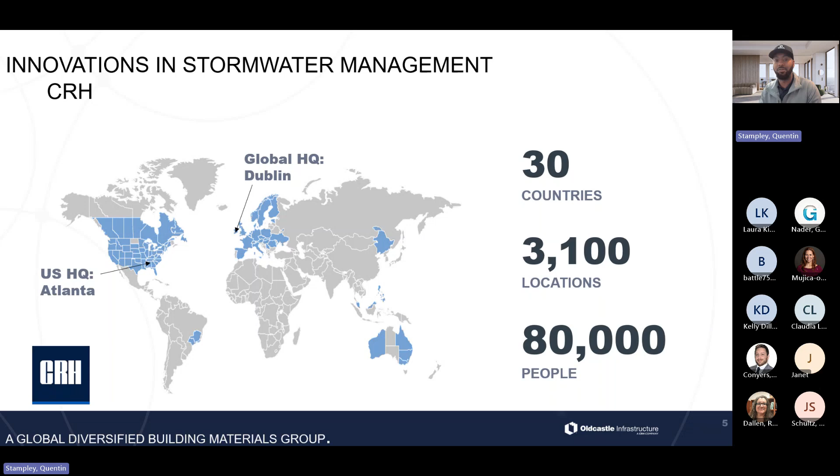Looking at this just shows a wide catalog. And with this wide catalog, we are the largest precaster manufacturer in the country. We're also able to service engineers across the United States. Every different state has different approvals, different regulations, and this allows us to have different products everywhere to service those markets.

It'd be nice in certain markets to add more, and we do have a regulatory team that will get in and work with the officials in the state to get things moving. That's one of the things I would like to have next, our regulatory guy get in with you all and see what we can start possibly moving in this market.

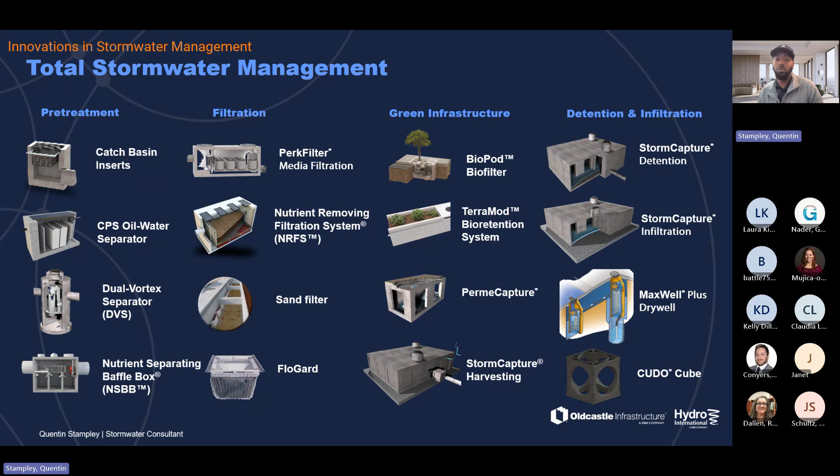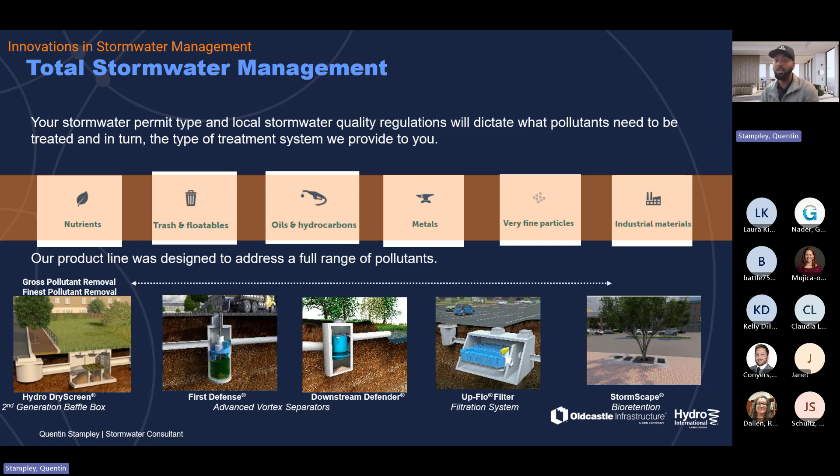Along with that, with the acquisition, we did acquire additional products where you get baffling, separation, filtration, and bioretention. Adding these five additional products is definitely helpful in the market. We also have some that are actually being tested in the lab, new products coming very shortly.

So today my focus is going to be on storage solutions, which will be our storm capture and our CUDO, and then we'll talk about pretreatment solutions, which will be our NSBB, downstream defender, and our first defense.

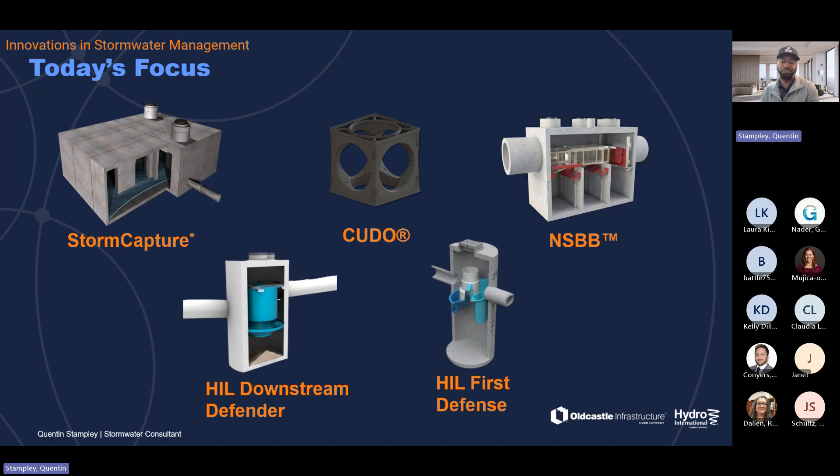So jumping in with our storage solution, storm capture. I can ask a question if anybody feels free to take themselves off mute to answer: has anyone seen any underground detention or possibly see where this can be utilized in the Oklahoma market?

I haven't seen any personally. I think there are some around here. I think there's a big one that was just installed not too long ago, but I don't remember the location. But yeah, we've got tons of parking lots and streets and parks, countless opportunities. It would just have to be retrofit more than likely.

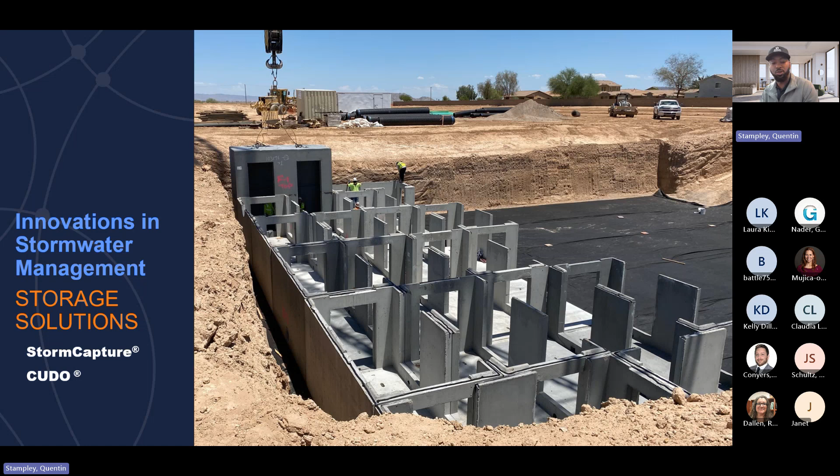Understood, thank you. I was trying to see if I can get it to show who's talking, but it's not working for me. I'll jump in and give a little background on storm capture. Again, if you have any questions, feel free to put it in the chat.

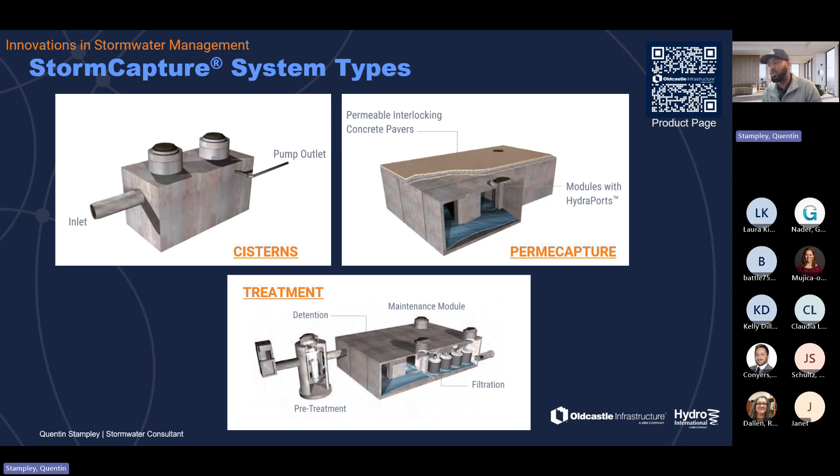And at the bottom, we have the ideal scenario: pretreatment upstream, your detention, and then also filtration modules around the outlet pipes.

Now, I did want to jump back into detention versus retention, because originally when I joined Oldcastle I was on the engineering side, and a lot of times when I got pulled into calls there was a big mix-up on what they were designing for. Was it detention? Was it retention? It was called out on the plans a lot incorrectly.

So I have this little saying that is, I think, very memorable. When you think of detention, just think about a child having to go to after-school detention. They're being held there for a short amount of time and then they get to go home to their families. So with your detention, that's what we're doing, we're holding that water there for a short amount of time. Your outlet pipe is at the bottom, so it's constantly draining out. There's no holding time for that water, but it's being slowed down to replicate the natural state before any impervious area is put in.

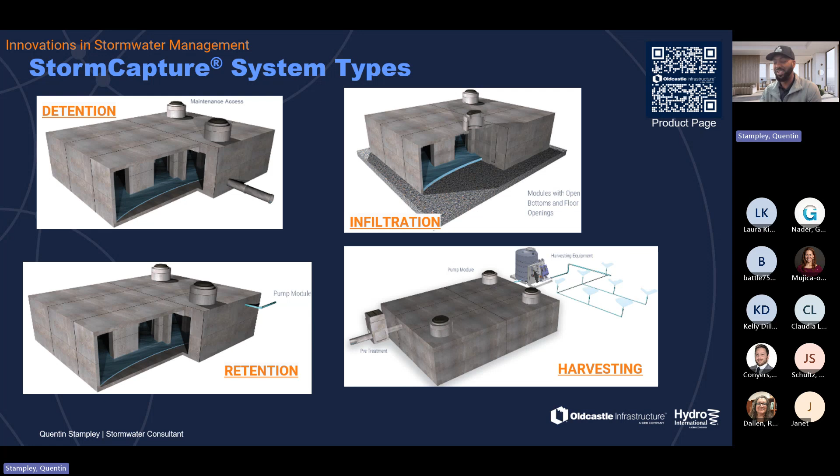When we look below, we see retention, and you also see the outlet pipe at the top. I always say, and I pause a little when I say it, you can think of someone going to jail and being held there for a much longer time. That's what we want to do with our water, we're trying to hold it for a much longer time. So that water has to fill up to a certain elevation in the system before it's actually able to be released. Those are the main differences between detention and retention, and once I explain it that way, people rarely have an issue differentiating the two.

With our storm capture, it's a structural precast concrete structure. The inside dimensions of our system are 7 by 15, and the outside dimensions are 8 by 16 -- it's a very big box. Our inside heights vary from 2 to 12 feet here in the Texas market. Other places, depending on where you're at, a deeper system would go up to 14 feet, which is the max we can go. We use standard accesses for maintenance, which is 30 inches in diameter, though we can go smaller or larger. We also have interior walls and interior windows.

Below my writing you'll see the SC1, that's our first configuration, an open top with a base, ranging from 2 to 7 feet. I always call this the bathtub design -- you see it sitting upright like a bathtub, and we just place a lid on top of it. Whenever we're doing infiltration, to let water drain through the aggregate layer into the soil, we'll just flip that bathtub over to allow the water to drain out.

On the right side, we have our SC2 module or configuration, which we call the clam shell because it comes together like an actual clam. The heights vary from 6 to 14 feet, but again here in the Texas market we only go up to 12 feet. I believe if we were to service Oklahoma, it would be shipped out of our Dallas location.

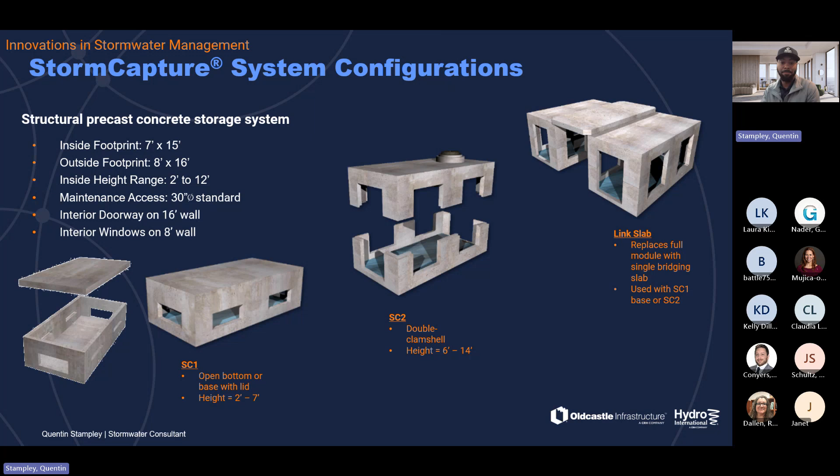With that, when we do our designs, we like to include something called link slabs. Our link slabs are slabs supported by the adjacent module. It replaces one full interior module, and we can use this for both configurations, SC1 and SC2. The slabs are typically 6 inches thick, but occasionally 8 inches thick depending on the actual design configuration.

We can do a checkerboard style, which you'll see on the left with the actual hatches -- those are the checkerboard style design. Then we can also do a straight run design. When we do a straight run, it typically depends on whether we're limited in footprint and need to increase the storage volume, so that helps us pick up additional storage volume.

We can use our link slabs on detention, retention, and infiltration options. Whenever you utilize a link slab, it will come with something called a grade slab. If you look at the snippet in the middle bottom, you'll see that slab bridged on top. In that dark blue area at the bottom, you'll have a grade slab that holds the system's invert to make sure water moves freely and correctly within the system.

The purpose of incorporating link slabs is to pick up storage volume and lower costs. You're removing all of your perimeter walls within that module, so you're saving on concrete and rebar costs. You're also gaining more storage volume by removing those walls, which also helps cut down the footprint.

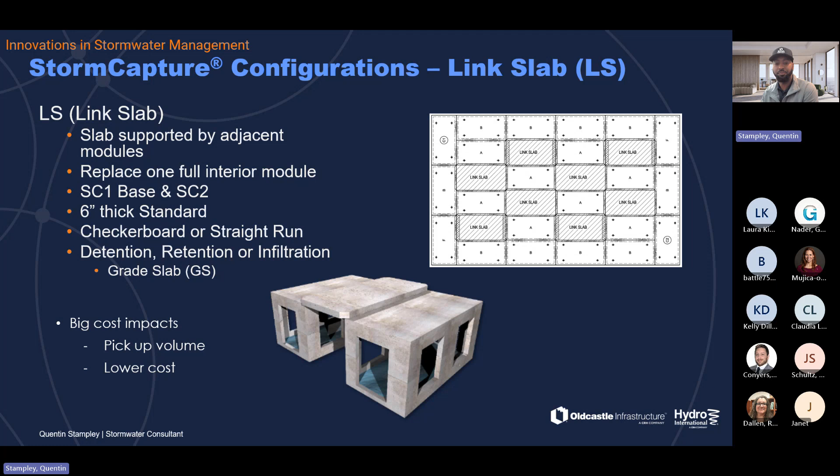Our module designation includes one interior module, which we call our A module. It's open on all four sides and is surrounded by other modules on all four sides as well because it's open. We also have our perimeter module -- if you look to the right, all the other ones you see outside of the A are what we call perimeter modules, which have one or more sides exposed to soils, and this is also open for pipe penetrations and connections. At the bottom on the A module, we have our short wall where we have our door.

The doors actually go all the way down to the system invert to allow the water to completely drain out of the system. On the long side, you have windows, like standard windows that have that portion right under the lip of the window. Once water levels are lower than the bottom of that window, there's a Termaduct below it, 4 inches in diameter, that allows water to continuously drain, just slower, throughout the system and out those side walls.

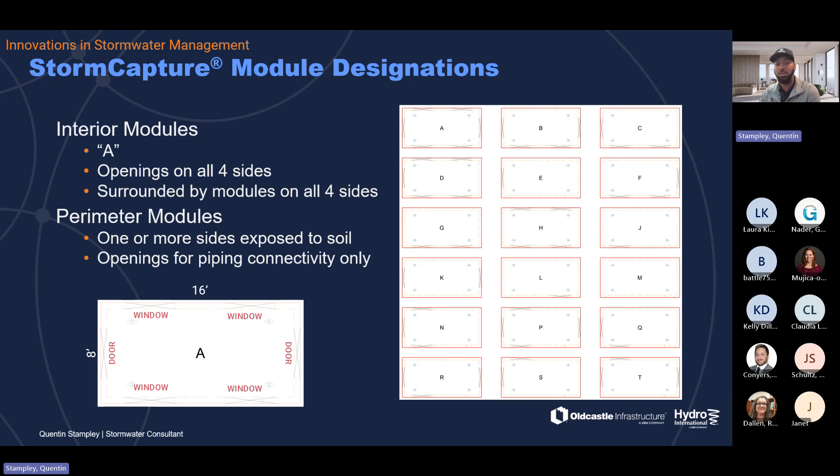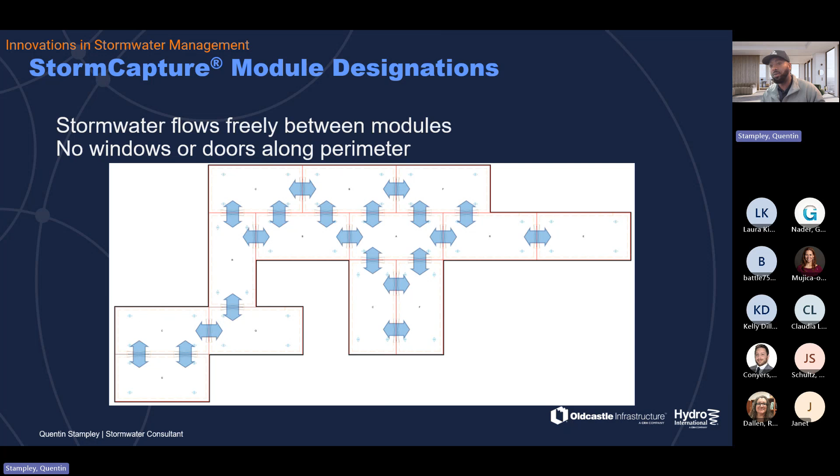This diagram shows all the different ways stormwater can flow through our system. Our system sits on a 0% slope, so it's drained by gravity unless you put a pump inside. Wherever your outlet pipe is will determine which way the water drains out, but there's no limitation on where it can drain. It will drain out of the system with less than 1% of stormwater left inside.

The materials we use on our storm capture are, first, butyl rope, a rubber sealant that goes on the horizontal joints. Some people call it RAM-NEK, some call it butyl rope, depending on what you've heard it called.

Next we have non-woven geotextile fabric, a roll dimensioned 15 by 300, which prevents fine soils from entering the system. Lastly, we have joint wrap, a self-adhesive wrap that goes on the vertical and top joints, which also prevents fine soils from entering the system.

Everything shown here is what we'd consider a soil-tight application. Typically when our engineers send us plans, if we're in a preliminary state, we'll walk through the design. All these things automatically go with this type of design regardless of the desired outcome. You'll still get the soil-tight applications, but as we move through the project, we'll determine if we need to incorporate other materials that may change it to a watertight application instead.

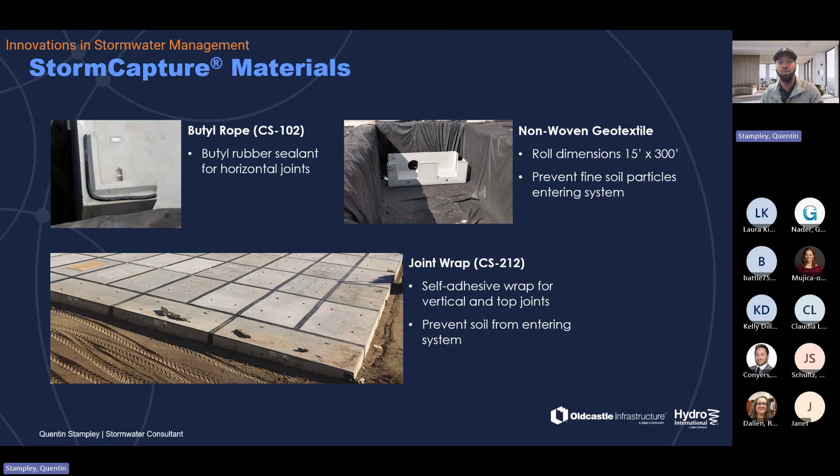With that, I typically ask my group when I'm presenting what they see differently or why they think we'd need a watertight application. Since this is virtual, I want to get some interaction since I can't see anyone. Does anyone know why we would want to use a watertight liner on something like this for detention? I won't bite. Anybody? Apparently not. Are you sure? So would it be just to control what water goes in and what water goes out, and where it goes in and out?

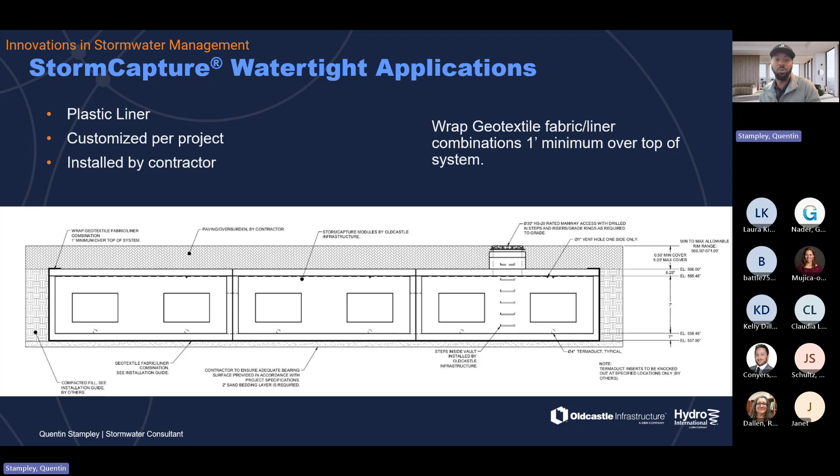Thank you for the response. I appreciate it. I love the interaction, it makes me not stutter over my words because I feel like I'm talking to people.

I have a slide where you can see where the application, or how the application, is being applied. Again, these are older photos where they were tying down the liner, but now you can just throw some sandbags on top of it and you're good to go.

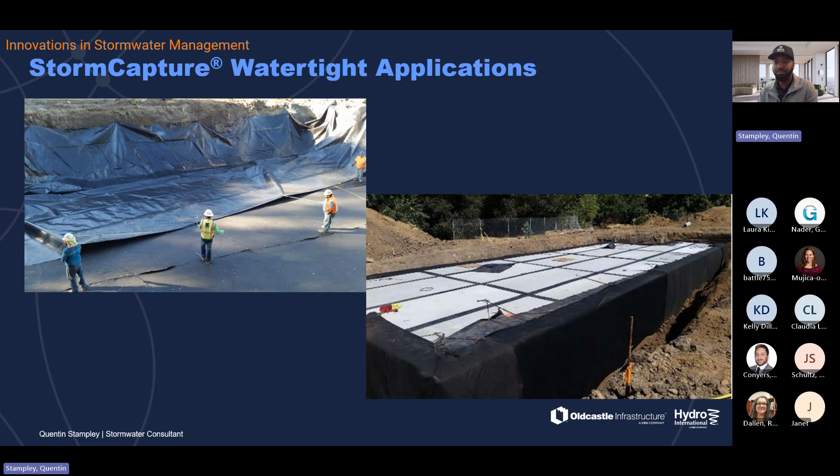Our system is HS20 rated, which is a design standard vehicle loading for bridges and highways. It represents the heaviest vehicle expected to drive on a road or bridge. This includes ambulances, most fire trucks, cement mixers, and semi-trailers. The HS20 is not a mining truck, farming equipment, compactor, crane, track vehicle, etc.

You can actually use construction equipment over our system in the field. We just need 6 inches of cover over it before they do that. And we always say if you can drive over a bridge on the US highway, you can drive over our storm capture. So you're getting a robust system.

I always tell clients this is like the Ferrari of detentions. You're really getting an engineered product designed to stand, I'll say 100 years plus, because we're dealing with precast concrete. If you want that longevity, this is what comes along with it, and the pricing will come along with that as well.

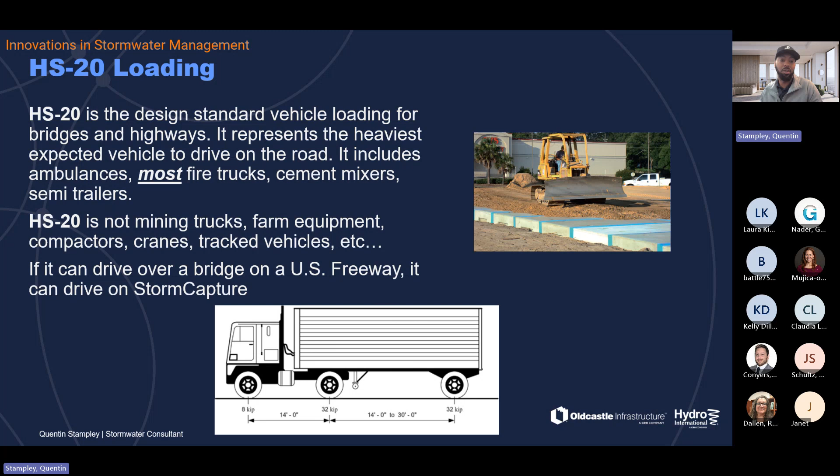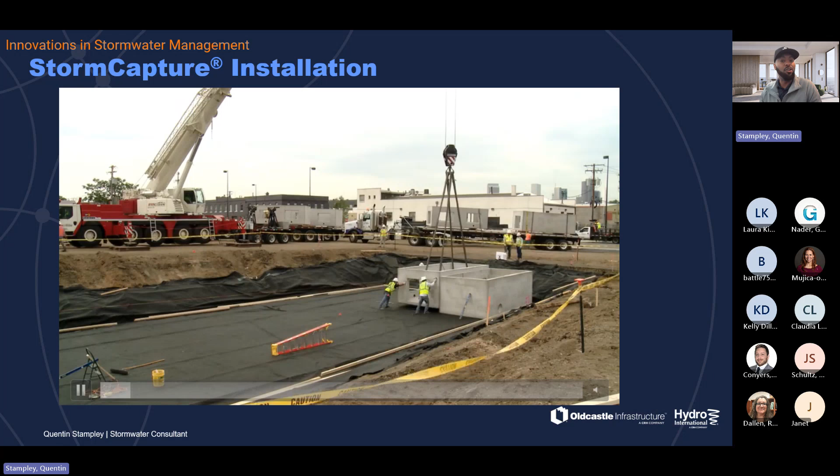I do have a video here just to show you how the install looks. I always say it's like everybody played with Legos once upon a time in their life - these are just huge Lego cubes. And the plans you get are the design if you're actually working to build a certain configuration.

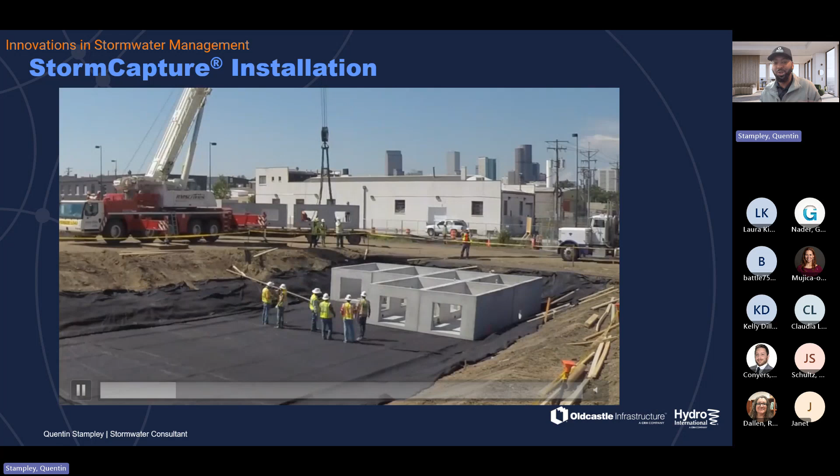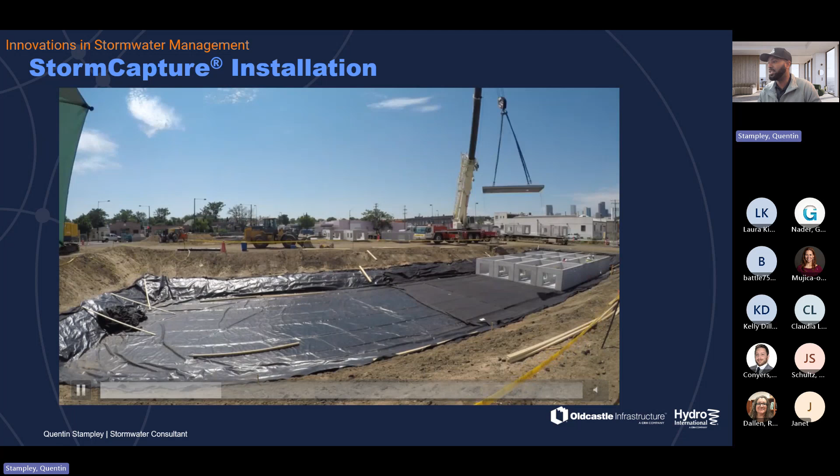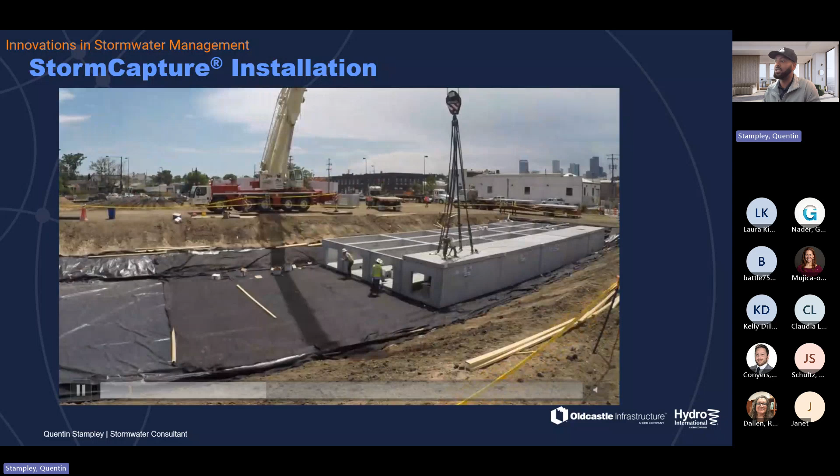In a pre-construction meeting, they'll talk about crane setup, where they plan to start. From there, we'll dispatch our modules to the site for an easy install. A lot of times they'll sit the actual lids to the side so they can get the modules in, and when they have a break between trucks, they'll start adding some of those lids so they're not held up. This install was done in 1 day, and this is a 6.5 foot SC1.

This is the first configuration we have, the bathtub design with the base and the lid. You can also see the materials being installed there with the butyl rope and the joint wrap, etc. And then you also see the non-woven geotextile fabric at the bottom.

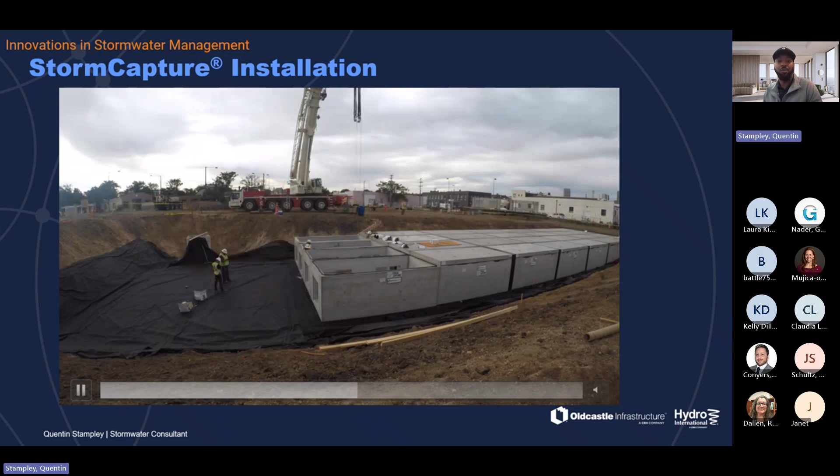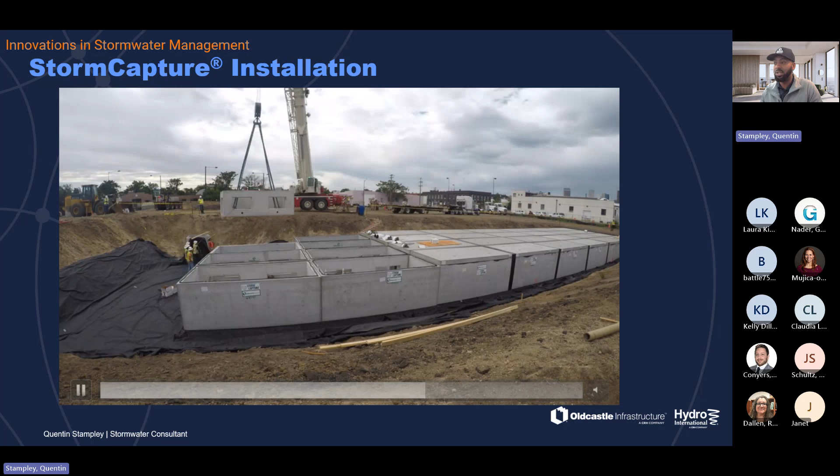One of the cool things about our system is we don't need a slope running for dear life. Whenever they dig the hole for the detention itself, all we need is 1 to 2 feet around the perimeter of where our systems should be for excavation purposes. That'll save the contractor money because they don't have to keep digging extra space just for these modules.

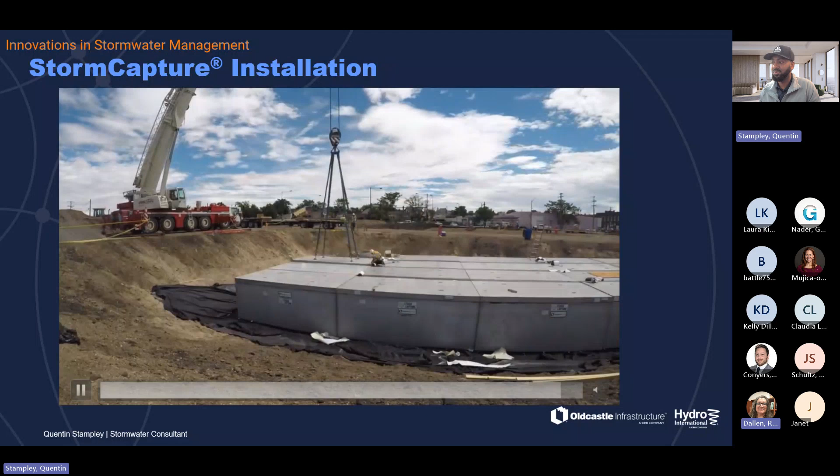No, I love this video. It's great, it really shows the whole process there.

That's fantastic, thank you. I have an install here in Texas that's actually starting on the 17th. We're doing a case study on it, so our marketing team is going to have a videographer come out, and they're going to do a nice little write-up and send it out to everyone in the Texas market, and I'll be posting it on LinkedIn. I'll be excited to share. If anybody follows me on LinkedIn, you'll be able to see that project and that design, but it incorporates our storm capture and one of the other products I'll be speaking on, the NSBB.

That's great, thank you. And that's something we can do in the Oklahoma market as well. Whenever that time comes where we start making leeway with stormwater in that market, we can have marketing come out and do case studies, and that'll help get the word out on whatever products are being pushed.

So I'm just going to jump in, and this one is going to be shorter because this is a product that's off the ground in our California market, but we're trying to expand it across the United States. One of the positive things for you all, we have an enclosures plant in Oklahoma, and our enclosures plant is plastic. So we're trying to get the resin for these actual modules correct with testing and plan to start producing these out of Oklahoma. So once that happens, if y'all end up moving to detention, this may be the first option over a storm capture that will be shipped from Dallas versus a local shipment.

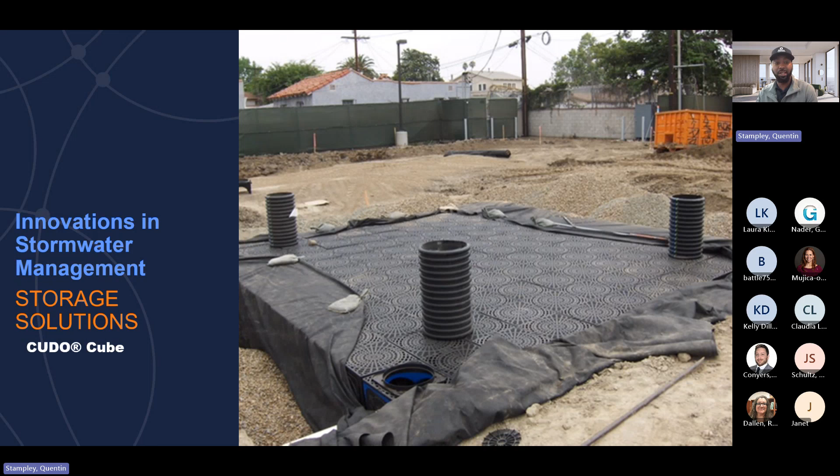So with that being said, this is called CUDO. Our CUDO is a modular plastic cube that's used to create compact underground storage systems, has a unique open design with structural integrity that increases the water storage, and it makes it easier for inspection and maintenance. And once you can see how the CUDO looks, you can kind of see what I mean with it making it easier for inspection and maintenance.

It is made in USA, currently California, hopefully soon Oklahoma, molded polypropylene plastic, and it is HS20 rated. CUDO is lightweight. Each one of these cubes are roughly around 21 pounds.

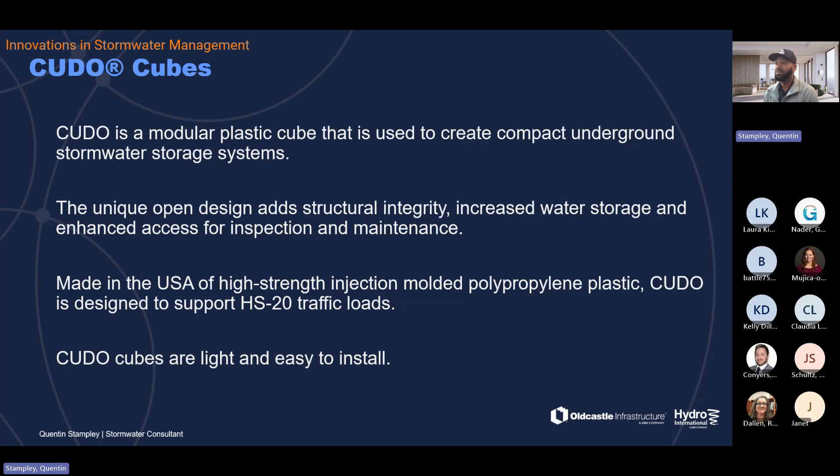As you can see with the CUDO on the right, it has a spherical design, so it is very open. So when it comes to maintenance, they can easily come in with a backhoe, put that backhoe down there and clean the system out. That also will prevent a lot of clogging in the system itself. No one will actually be able to get down in there, but they'll be able to actually clean out the system. So that is one of the positives.

With that, 95% of this cube will be utilized for storage volume. The other 5% is the cube itself. It is 24 by 24 by 24 inches. And again, it's very lightweight, so it's easy to handle and easy to install.

It does have minimum number of components. I don't know if you can see from the picture, it has like a line right in the middle. It is two pieces, snap together, snap apart. So it makes it very easy for them to get in the field, have that install, and get out of there. This can use native soil, so that saves the contractor money for buying additional soil.

Here we use C33 sand. I'm not sure what the Oklahoma market would use, but that would save the contractor money on bringing in additional soils. 18 inches is the max pipe size, but we can have a connector, a structural connector, if we do have to have multiple pipes that are much larger.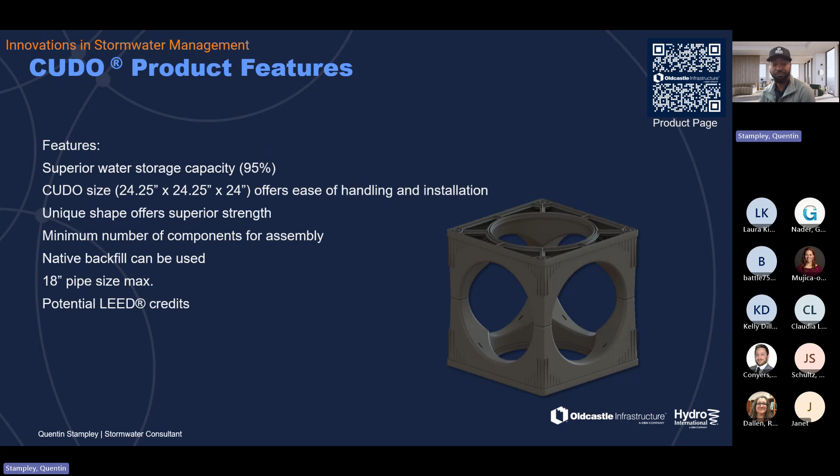So with this, the max cover over this system is 5 feet. Minimum cover is 2 feet. If it is going somewhere that's going to have live loads, we'll have to include a geogrid. That geogrid is not mandatory if it's not going somewhere that is going to have live loads. With that, a geogrid basically just evenly distributes the live load across the system, so we won't have any failures.

At the bottom, you can see we have a CUDO 1, 2, 3, and we also have a 4 as well. But depending on if we're going to have storm capture in the same market as CUDO, then we would not push the 4 because the storm capture will be cheaper at that point.

On the right, you can see the different components. You have your bottom panel, the CUDO cube itself, side panels, and if we're stacking these for a deeper detention, we'll have a coupling and a pipe panel for those pipe connections.

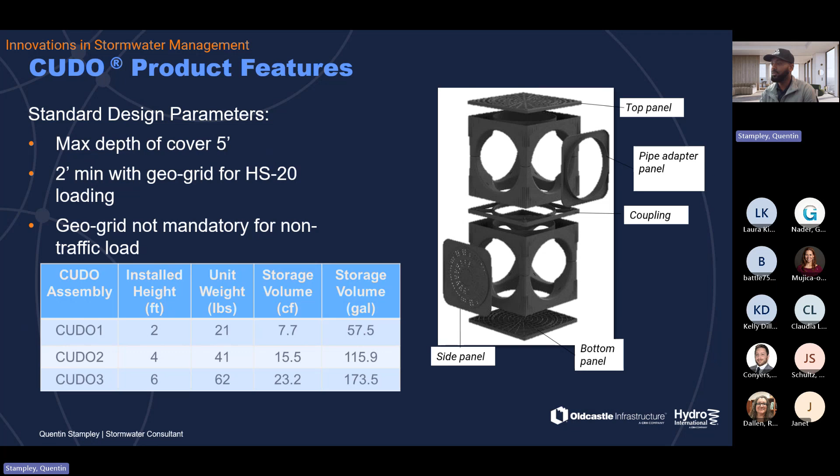With that, since no one can actually get into the CUDO itself for maintenance or inspection, I should say, one of the things that we always pitch is using an inlet filter so we can catch all that sediment before it's introduced to the system, and that will give it more longevity. If I remember correctly, these typically last 50 years or more. So you're still getting a long-lasting product with the plastic.

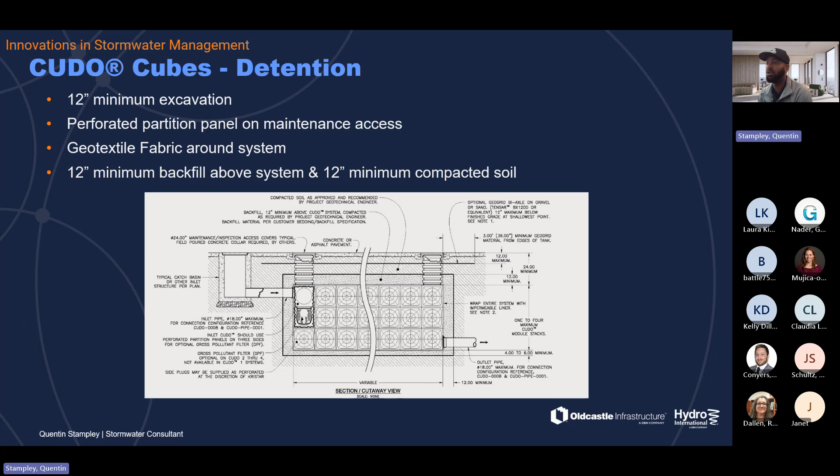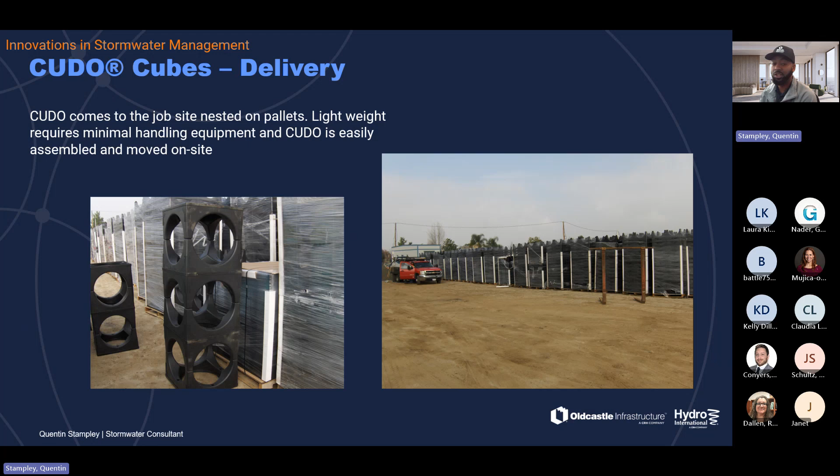So this is how it would actually arrive to the site. They're neatly nested on pallets. I always think about the grocery store - I used to work at one in high school, so it reminds me of groceries coming out on pallets. You can get about 30 modules on each pallet, so if you have a smaller site, you can really service that site with just one truck, which cuts down on freight costs.

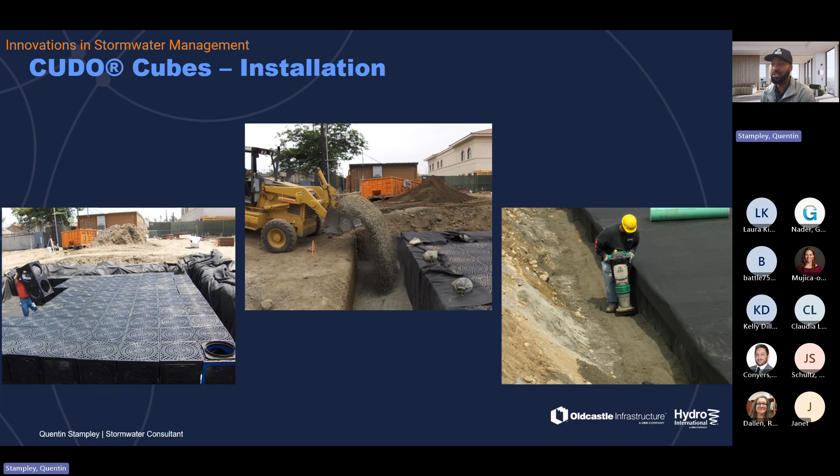I just added some install pictures, and when I said they were lightweight, you see that guy down there just picking them up 2 by 2 and placing them. One thing I like about that bottom left photo is you can see how flush it is, with no opening, so we're not relying on aggregate for storage. All your storage is held within that cube, so the contractor doesn't have to worry about buying aggregate for the project, which saves them money.

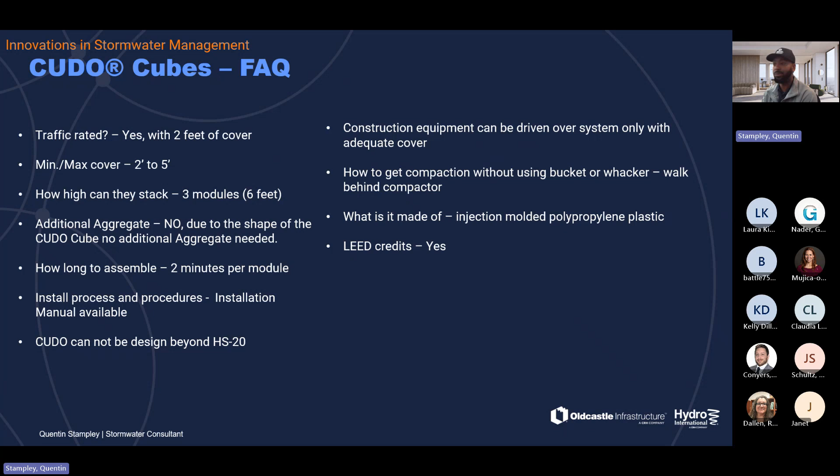So that was my last slide on the CUDO product. I wanted to incorporate that because I know it's a plan for the company to get it pushed in Oklahoma to start being produced. And if we make leeway in the Oklahoma territory to start doing underground detention, putting these things in parking lots, getting the water off above ground detention basins, and being able to utilize more real estate, then this may be one of the first go-tos you all would move to, because it's right there in your backyard.

And I'll pause just in case anyone has a question, comment, or concern while I take a sip of water.

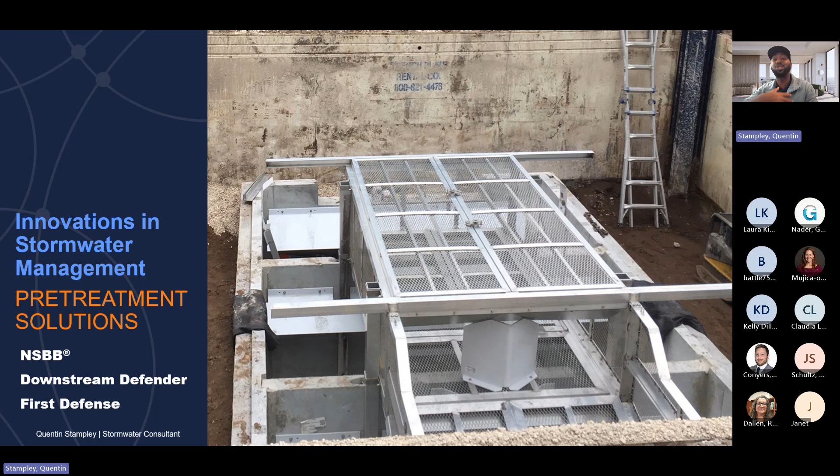So again, the first thing we're going to talk about is the NSBB. And if you remember earlier, I said we had two products being installed in the next 2 weeks in the Houston market with that case study - this is one of those. Again, the NSBB, which is a nutrient separating baffle box. This is a trash capture and a hydrodynamic separator, so you're getting a two-in-one with this product - a pre-treatment system that removes TSS, that's your total suspended solids, gross solids, trash, and debris.

One of the unique things about this product is it keeps the debris in the dry state. You see that cage at the top - the water actually flows below that line unless a 100-year storm comes through and raises it up. But when those water levels settle, all that trash and debris is collected in that cage, which makes it easier for maintenance to come clean out the system. It also prevents nutrient leaching in the system itself. So that's one of the go-tos.

A lot of people, if they're not really looking for the treatment portion, look at this for the trash capture portion, because at the same time you're getting treatment and collecting trash, depending on where you're located at. So these are definitely really good in coastal areas, just to keep all of that out of our waterways.

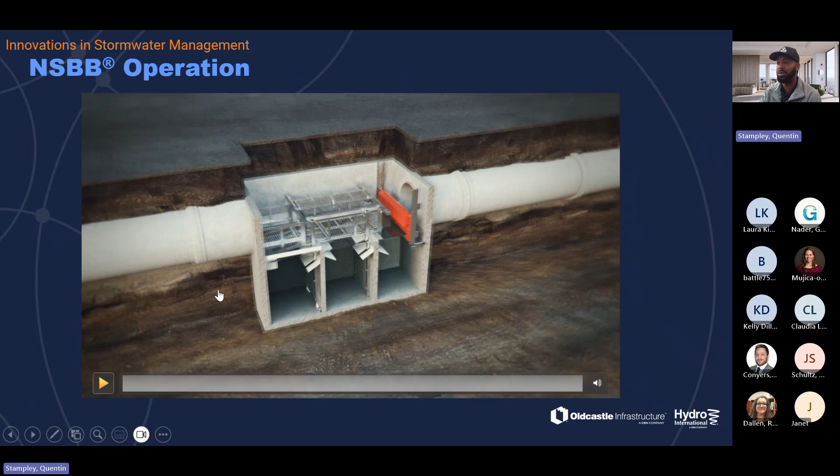I do have a video here. It may play audio, it may not, but just let me know after I finish if you couldn't hear it or not. Here's how it works.

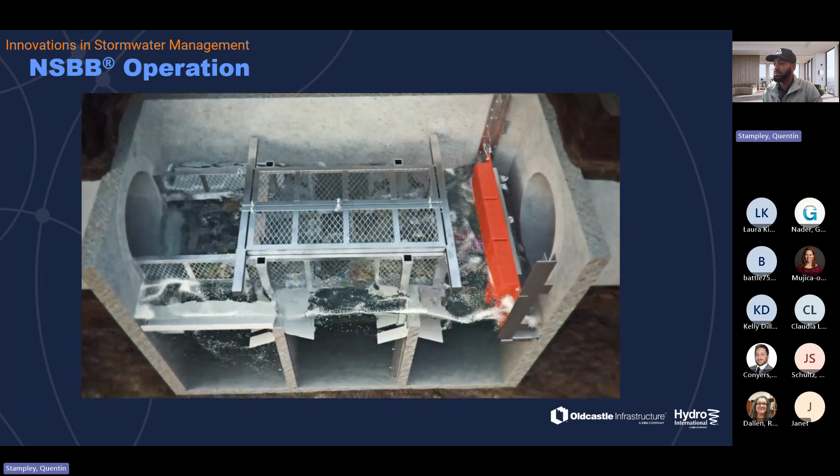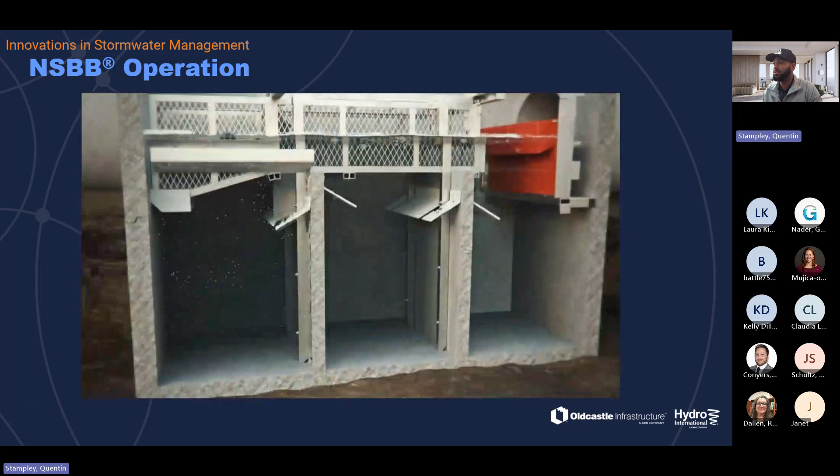A centrally located rectangular screen sits suspended above the static water level to filter and capture gross solids and pollutants in runoff, while hydrocarbons, floating trash, and debris collect in front of the floating skimmer. The lids on the screen system prevent debris loss and nutrient leaching, and proprietary turbulence deflectors work to prevent sediment from becoming resuspended and therefore settling in the lower chambers. Hydrodynamic separation is facilitated by 3 settling chambers used to target smaller sediments and particulate metals. The Skim Boss Max allows for longer detention times for increased total suspended solid settling.

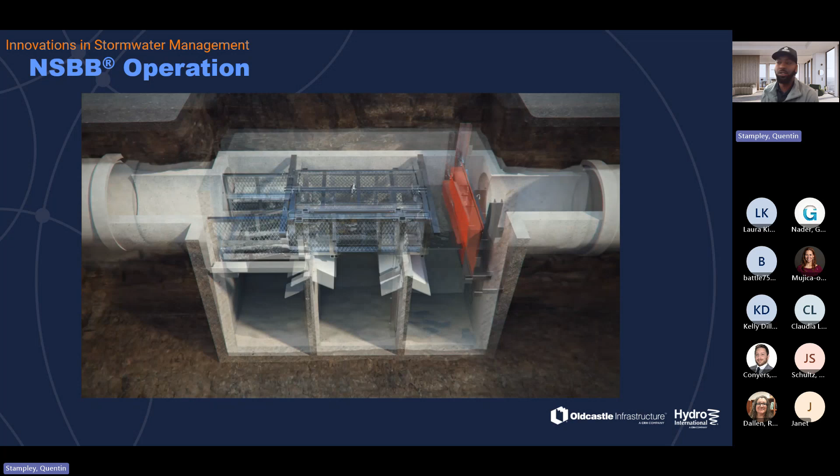All right, so I snipped that video just to keep it short and sweet. One of the things too with maintenance, if you can see each chamber here, I'll go back.

You have access on each chamber, so they can come in with that vac hose. This actual area right here opens up, so they're able to access this bottom with the vac hose and clean this portion out. These doors at the top slide open, and inside the actual cage, they open up, so they're able to clean out this area as well. There's nothing in the way here to block it, so they're actually able to service that area and keep the system nice and clean.

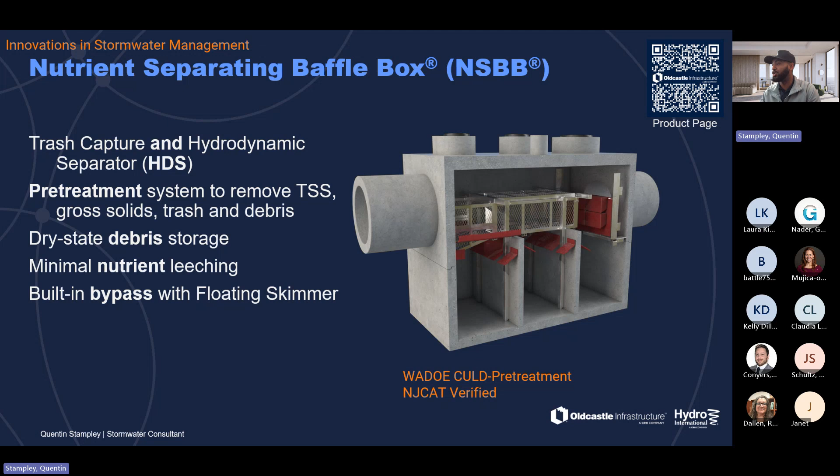As far as cleaning out the cage itself, all you have to do is just get a net, scoop out all the leaves and debris and trash, and you're good to go.

Here's install - okay, I jumped too far. So here's install: we don't have to go with just your standard manway accesses, we can go with hatches as well on top of the system. So it just really depends on where the application is being placed.

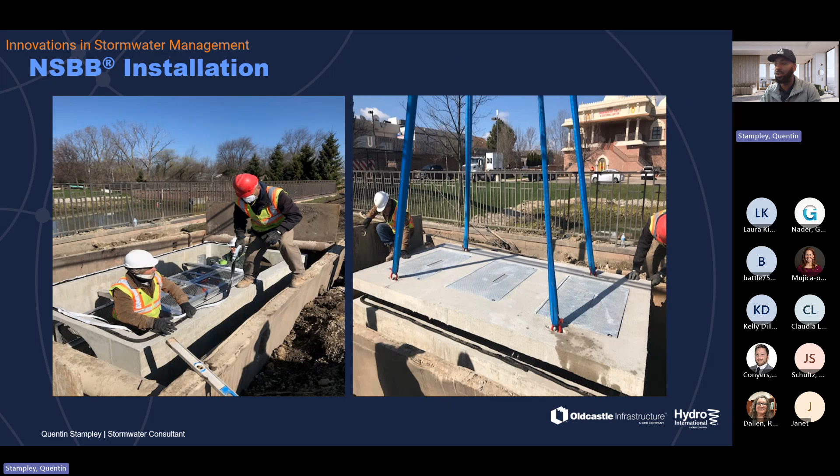These boxes come as small as 4x8s, as large as a 12x24. With this, we can actually create a larger box depending on what we're needing to use it for. We have one coming off the Mississippi River that's fairly large, handling a large flow, and it's a non-standard box. So we're able to engineer these products and not go with the standard, depending on the needs of our engineers.

So that was quick on the NSBB. The next two, I want to just jump into the two products that we acquired.

A little background on Hydro: they have 40 plus years of experience in the stormwater industry. I did mention that they're leading the charge with research and development. They have multiple labs around the United States and in the UK, which is where we're mainly doing our testing at. We gained some water quality experts, and their headquarters is in Portland, Maine.

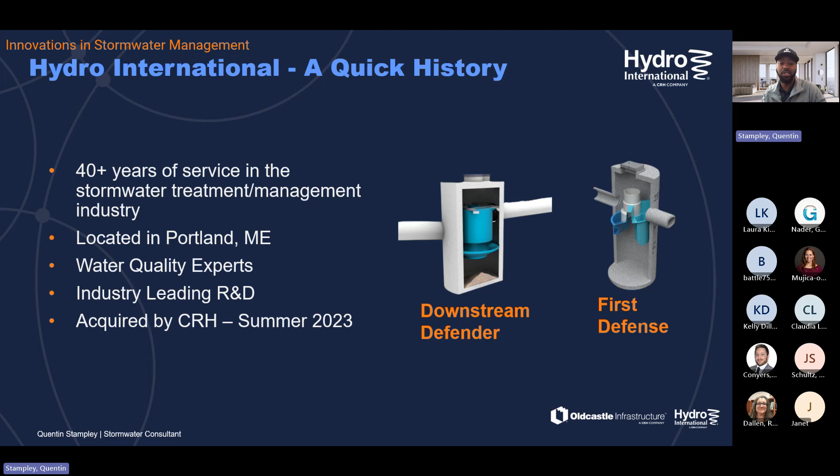So the ones I'm going to highlight are the First Defense and the Downstream Defender. At the end, I'll kind of just break down what is the main difference in the two applications.

So first, with the First Defense, we do have a high approval flow rate with NJCAT and NJDEP. We have versatile capture for sediment, trash, and floatables. It does have an internal bypass, and this cuts down the footprint and cuts down costs. I see a lot of times, because we have a lot of competitors in this area where we're sizing for the same projects, we're able to cut down that footprint for some of our customers - where they may be getting an 8-foot unit with someone else, we're able to cut it down to a 6-foot unit. Or we're able to pivot to the NSBB if it's a larger unit, like one of the 10-footers, and bring it down to a 5x10 or maybe a 4x8.

So it really just depends on what the application is for. But with this, since they do have high flow rate approval rates, we're able to cut down those footprints. You also prevent washout and save on installation time with our system.

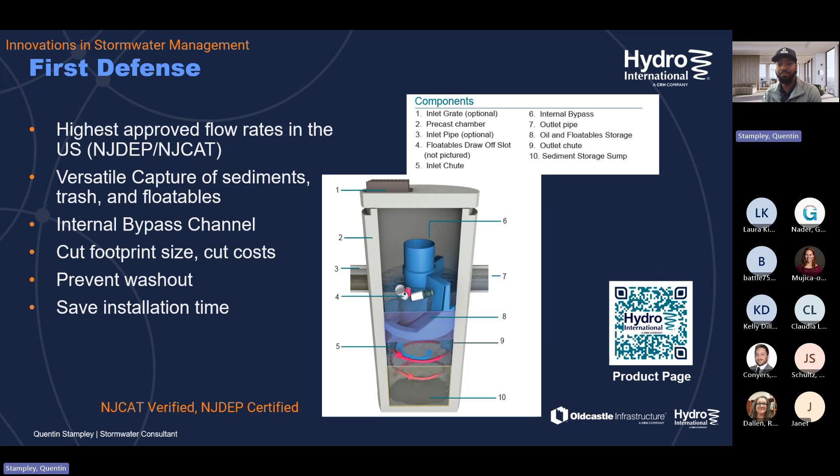With this as a versatile design, one of our main products got sunsetted after we released this one. One of the things I do like is, and I don't know if you can see my cursor, your inlet pipes can go anywhere within this C right here. So that helps the engineer with that design if they do have pipe angles coming in funky different directions.

With our old product, you only really had this area to be able to come in with, so it was very limited. I do like this because we're able to help service our engineer and not make them really change up their design if they're further along in the process.

The next bullet point: accepts multiple inlets. Another cool thing is you can have a grate inlet or curb inlet directly on top of this. So instead of having just your typical manhole or curb and gutter, you can have your actual hydrodynamic separator acting as your curb and gutter. That, in my opinion, is very cool. You're cutting down on a structure, saving money to your client.

That's one of the main things we're trying to do, service and save money here. You can have this inline or offline. I don't know who all's on the call, if you know what inline and offline is.

Inline is basically what you're seeing here. Pipe comes directly to the system itself and then leaves out. Your offline scenarios will have a different box, and then the water will flow to the system to actually reduce some of the water volume that's coming into the system itself.

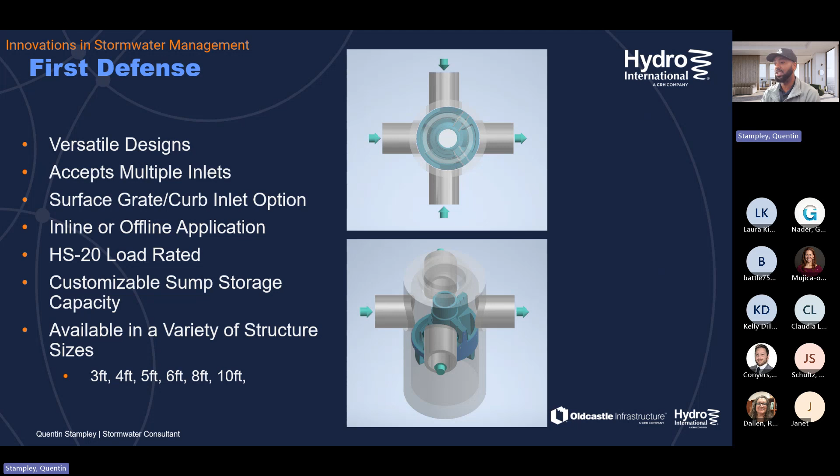And lastly, this comes in sizes of 3, 4, 5, 6, 8, and 10 - that's the diameter of the system. So if you think about a 10-foot diameter, that's fairly large. So that just lets you know we are able to service a wide range of flows.

I have a little video here, and it's just really showing what I depicted with my cursor, where we can have that inlet pipe come in at various different angles, and then also different sizes as well, and multiple pipes.

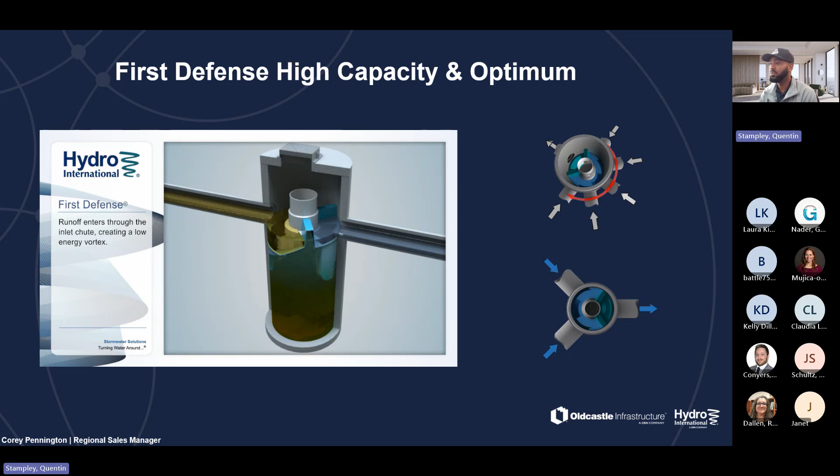So now you're seeing a storm event coming through. I don't know if my video - I think that was all it was in the actual video there.

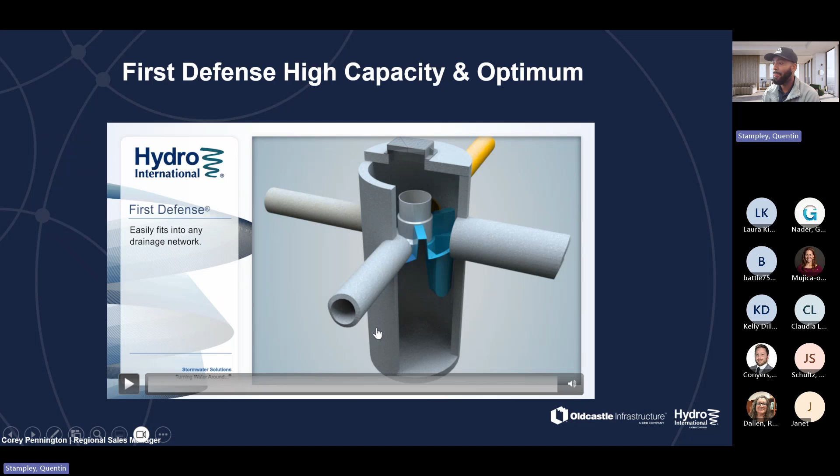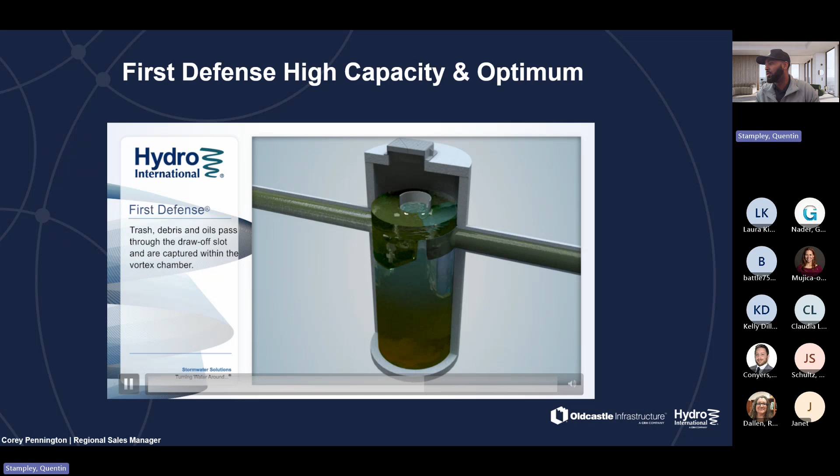I think this is where it picks up here. So you see that storm event coming through. You can see the brown water replicating untreated water and how the system actually works. It's creating a vortex at the bottom and coming under that weir area and exiting out where you have your treated flow, and all your sediment, trash and debris will be collected at the bottom.

This is high flow, so your 100-year storm is where the bypass is at. Instead of clogging up the system or the system backing up, it'll be able to go over the weir and exit out your outlet pipe.

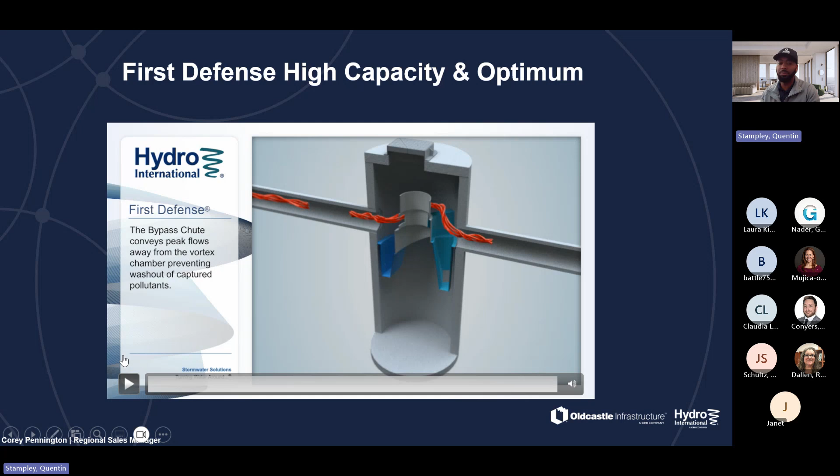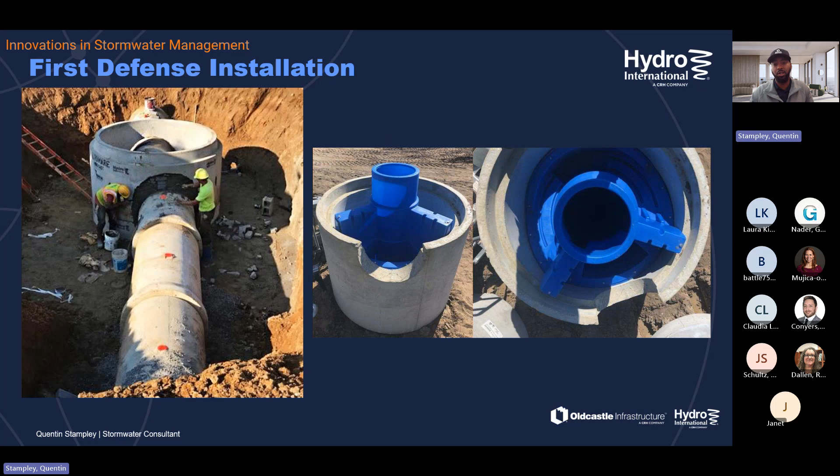With that, on our larger units, we do the internal installations in the field. So somebody from Oldcastle will be out there to do those internal installations.

As far as maintenance, this is one of the things that needs to be pushed more, because a lot of times these things get installed and forgotten about. As far as maintenance, I always say right after you have the install, you'll want to set up a routine just to check it, because every site is different.

We can give our standard: go out there 6 months after the install and then set up a 12 to 18 month cycle for your maintenance. But each site is different, collecting different particles and different sediment, and some of these systems back up quicker than others. So the best thing to do is after that install, check it after each rain event so you can see how much is building up, and that'll let you know what routine maintenance you need to have for that particular site.

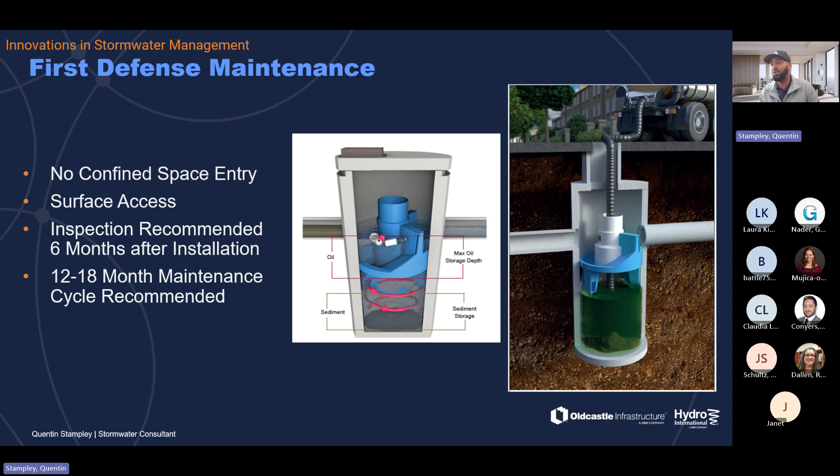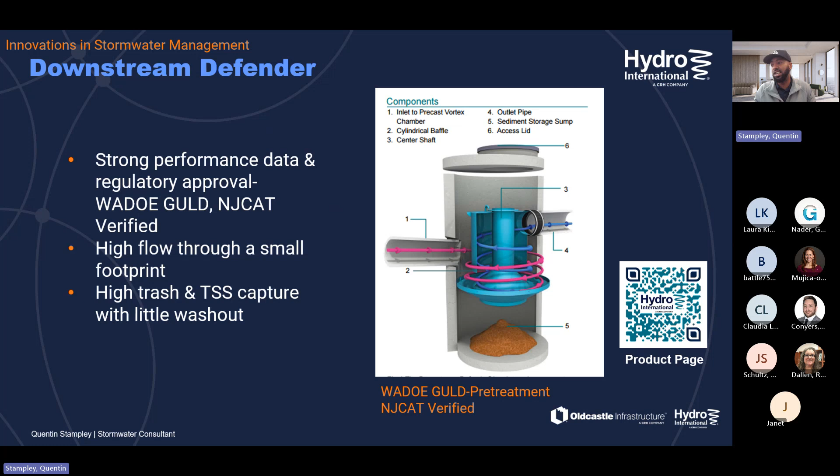So next is the downstream defender. We are moving to a different product. The first one was the First Defense, this is the downstream defender. We offer both of these products in every market because they're used for two different things. With this one, it has a strong performance and regulatory approval with Washington GULD and NJCAT. It has high flow with small footprints and high trash and TSS capture with very little washout.

So when that high flow comes through, the good thing about this product is there is no bypass. Everything that comes through this system will be treated. The previous two systems that I showed you have bypasses where it won't be treated because it's bypassing out the system. Here, you're getting full treatment regardless of whatever storm event that you get.

Quentin, I have a question. Yes, ma'am. So on systems that don't have a bypass, what types of challenges do you see or have you seen with those regarding like any upstream flooding?

With that, we typically always design accordingly. So when we get the plans, we'll make sure we see what the velocities are coming through those pipes at all storm events. So we're actually designing it to be able to withstand your 100-year flood and that first flush. So we'll make sure that our sizing is capable to handle that 100-year storm. And with that, even with this system, if it doesn't have that bypass, it's designed to handle flows as high as whatever that 100-year storm event will be.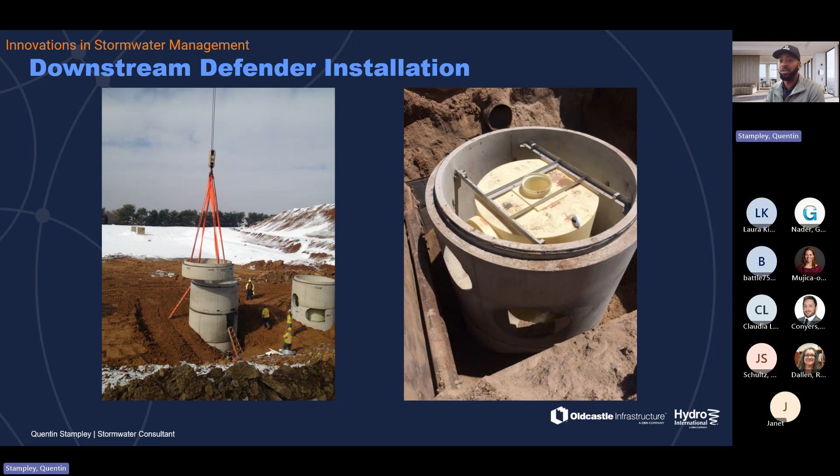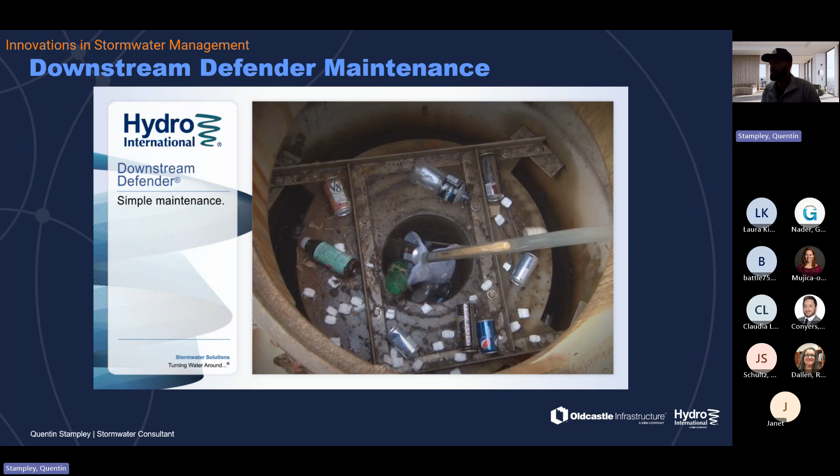Ensure proper function and maintain high pollutant removal efficiencies. There is no need to enter the chamber, and costly, time-consuming dredging operations can be avoided. During maintenance, the floatable pollutants are skimmed from the top surface of the outer ring, and the sediment storage zone is accessed through the center shaft of the chamber.

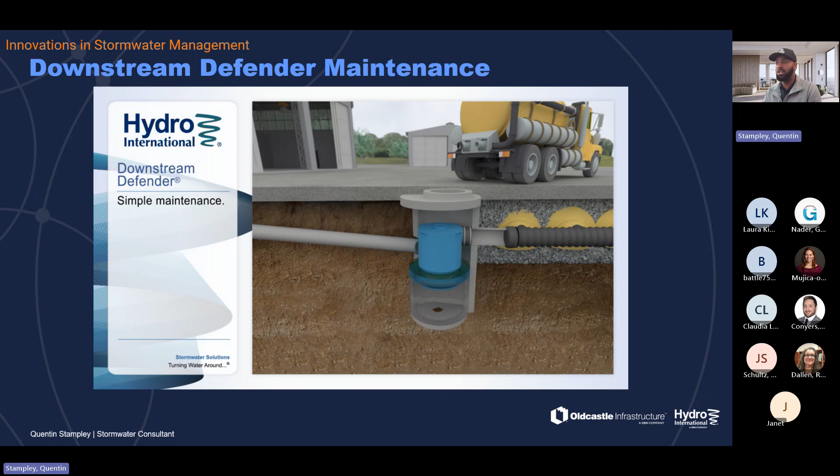So very quick and easy on how to clean out the system. Again, just like the last product, we want to make sure we're setting up our own maintenance routine by checking the system after a storm event. And that is basically what's going to help us keep the systems clean.

Now, when we talked about these two products, First Defense and the Downstream Defender, the difference between the two is that Downstream Defender is also designed to collect oils. So if we're somewhere that needs oil separation, like near gas stations, or parking lots that are picking up oils from cars, that is the design you will want to go with, because it's designed for those uses.

The first one is more so like residential, shopping areas, things like that. So typically when we're working with the engineer, we'll ask where is this going to be located, and that'll let us know what we're designing for.

Also, if you have issues with high groundwater tables, the Downstream Defender is able to fully work completely submerged, just like it functions within a 100-year storm without any bypass. If it is completely flooded, it will still work. So that is what we look at before we just throw something out. We'll make sure we're putting our products in the right place before we actually call it good.

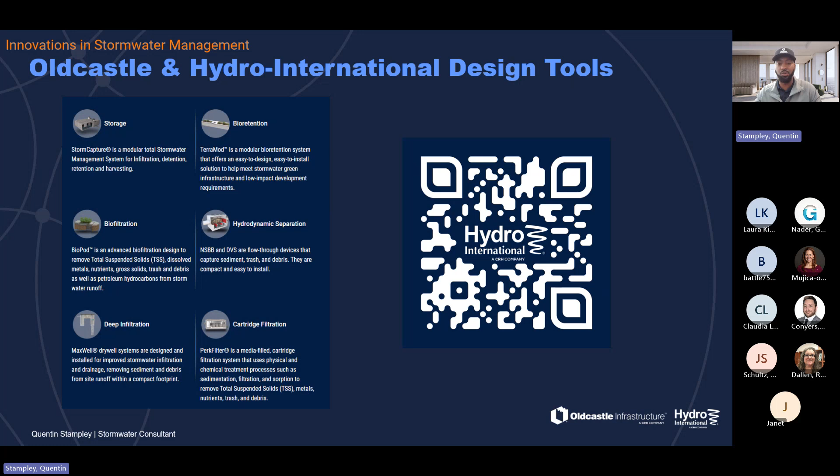Lastly, we do have a design tool. Hopefully in the near future, you all will be able to utilize this. Currently, we're still trying to integrate everything into one design tool, but currently we have two separate ones, one for the hydro products and one for the legacy Oldcastle products.

But what I think is neat is our engineers can get on the design tool. They can throw in their plans, lay out where they will want their detention, put in all their site-specific information, and it will produce the plans for them, the same thing that you would get from our engineering team.

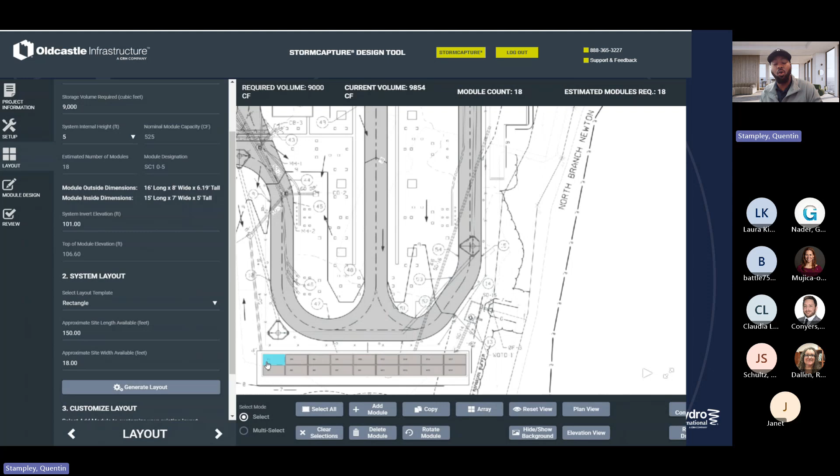With that, they'll receive a PDF version and a CAD file version. So if they needed to submit to the city or anything like that last minute, they'll have that right at their fingertips. And I'll get an email saying that they utilized our system, and I'll reach out to those engineers to help them optimize it, or just provide pricing.